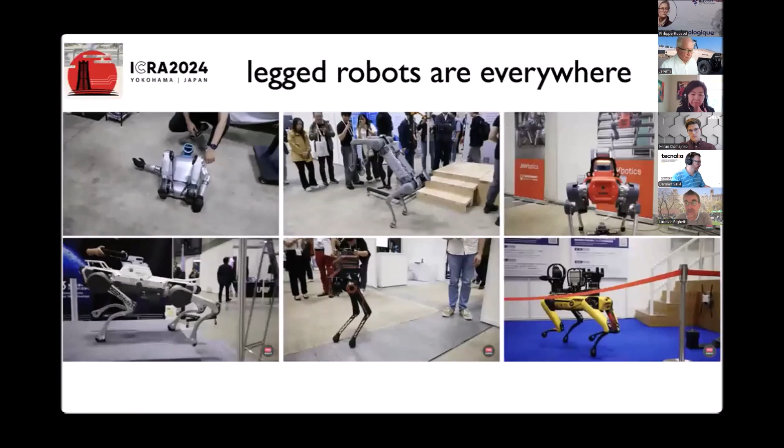I titled my talk: is robotic locomotion a solved problem? I'm asking this question because if you go to a robotics conference these days, this is what you will see: robots walking everywhere.

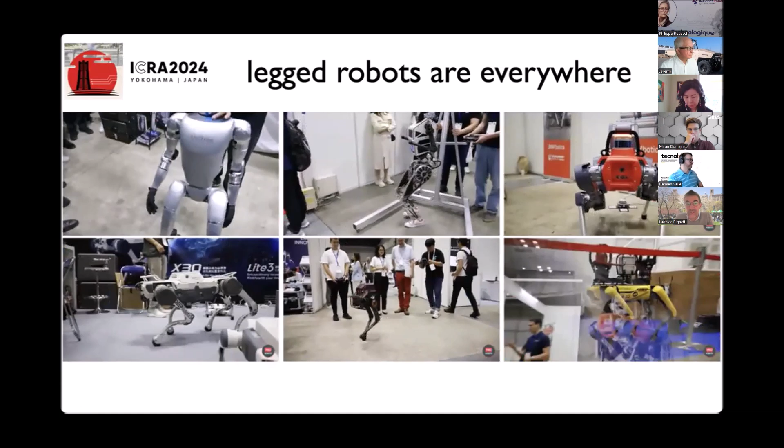And this is really new. Five years ago, you would never see robots walking around so casually, with crowds around them and things like that. So one of the big questions is, what has happened? How did we get there?

The easy answer is to say, well, we've made so much progress in science this past few years, that's how we got there. And I was wondering if this is really the case, because leg robotics has a very long history. In 1984, simpler humanoid robots were already able to walk.

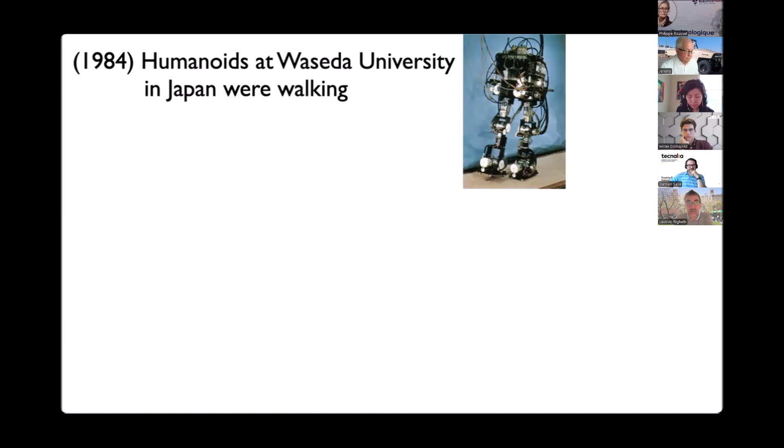At Waseda University, they built a lot of humanoids, and they were already walking in 1984, which is 40 years ago. If you look a bit closer, the MIT Leg Lab had robots that were able to do crazy things—jump, backflips—and these are all things that we see today in robots, and this was already 30 years ago.

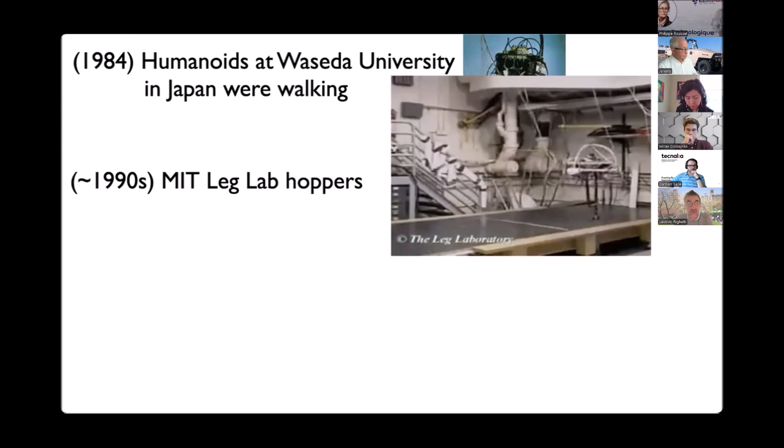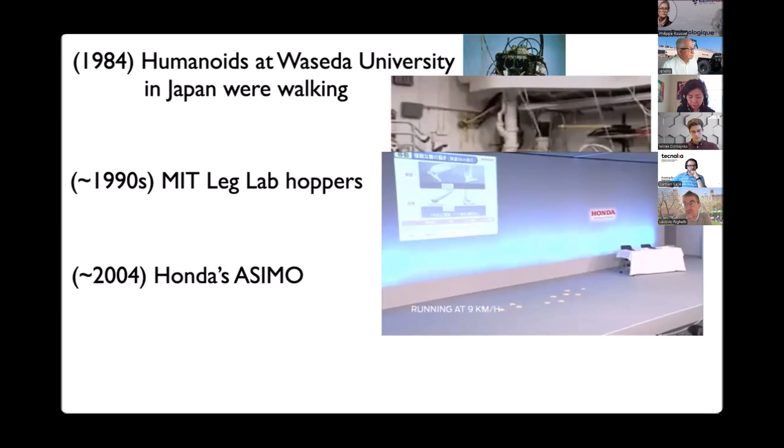A bit closer, 20 years ago, look at Asimo, the robot from Honda. It was able to run—it was actually the first humanoid robot that was able to run. And if you compare that to the latest humanoid robot of Tesla, you could argue that Asimo is actually much more capable of movement, and that was 20 years ago.

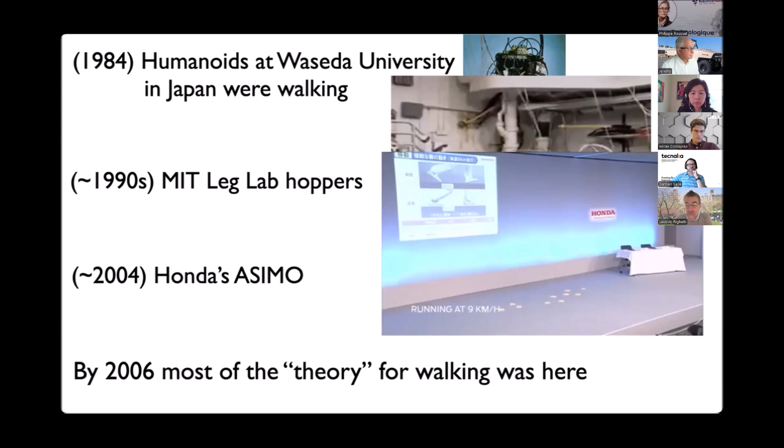And if you look at the science of walking, most of the theory we use today to get robots to walk already existed by 2006. So one of the questions I was wondering is: why didn't we see tons of leg robots back then? Because everything was there—all the tools we needed, to some extent, already existed 20 years ago or before, and robots were already able to do very impressive things.

So there are two things I'd like to explain. One is that at the time, robots were able to do many impressive things, but were not able to adapt their behavior in real time—I'll explain what that means a bit later.

And very few people actually had access to leg robots. Most of these robots—if you wanted one, you had to build your own, and it was really a small club. To be part of the club, you had to be able to build your own leg robot, so very few people were actually able to do research in leg locomotion.

So a long time ago, let's say 20 years or more, this is how things would work to get robots to walk: you would compute offline, before putting it on the robot, all the movements you wanted the robot to do—what should be the motion of the legs, what should be the motion of the arms, and everything like that. That was done in advance.

And once you had that, you had a controller and some sort of stabilizer that was just trying to follow this plan. Online, you were estimating the state of the robot, what was going on, and then you would just execute this plan.

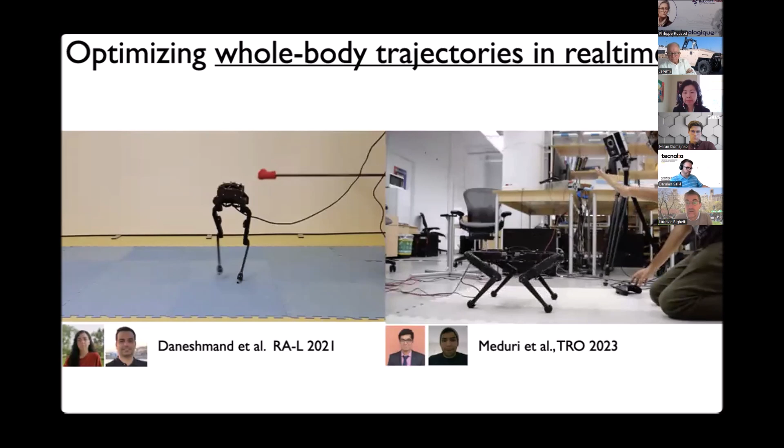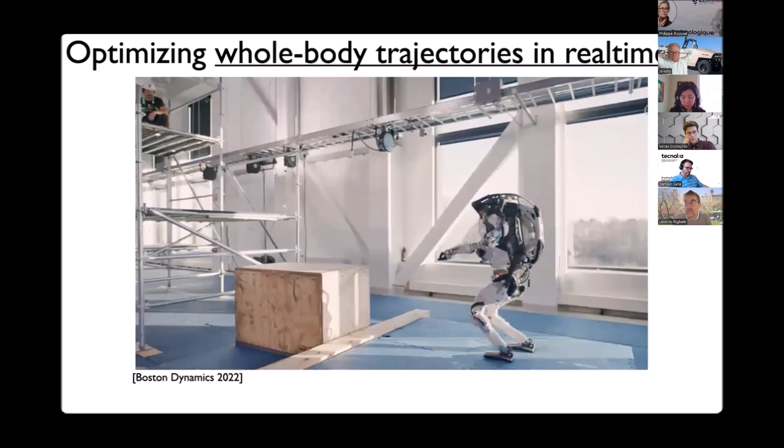To give you something you've maybe seen, this is the exact technology that has been used by Boston Dynamics. They use this kind of idea where you optimize on the fly what you want to do, and this is how you get the robot to do a front flip like that. So this is a very powerful technology.

So this is where we were at maybe a few years ago. We were able to do these things online and do very complicated things. Here what we optimize is the next trajectory. But then you always have to re-optimize each time something changes. Each time you measure a new state or the environment has changed, you have to recompute and re-optimize what you should do. So people say, okay, why don't we just optimize every possible configuration for every possible state I might be in, every possible obstacle I might see? Why don't I optimize that?

So it's a much more complicated problem now, right? Because I have to optimize a function that is going to map every possible state to an action. And this is what we call reinforcement learning. And this really made a huge difference.

But now the kind of irony is that we start to redo everything offline because it's way too expensive. So now we compute offline using a simulator. We simulate millions of different ways for robots to do different behaviors, for walking, for example. And then we encode into a neural network, which is our policy, the function that maps for every possible configuration of the environment and the state of the robot, what the robot should do. And you do that offline. So it can take a few hours, maybe a day, if you do very complicated things.

And once you have that, you have a policy that you can just query online, and it will actually perform a certain behavior. So there's no more deliberation online. Everything is done offline. But what is really nice when you do that is that you can suddenly fuse in your policy all your sensory information. That's something we were not able to do before, is to fuse vision and all the sensors that you have inside your policy. So now your robot is able to react to visual changes of the environment, for example.

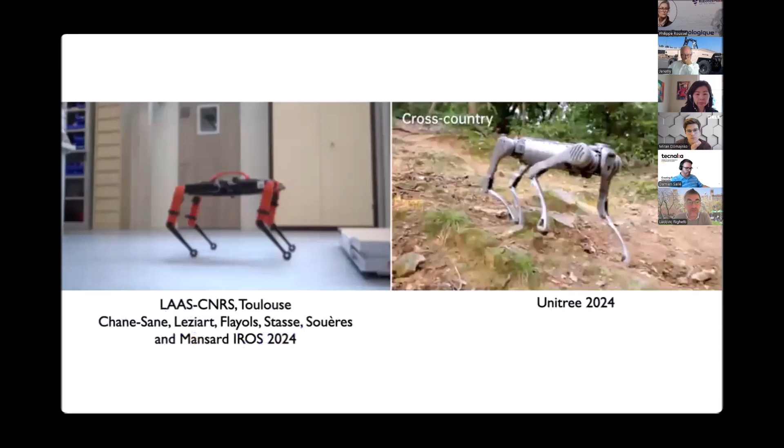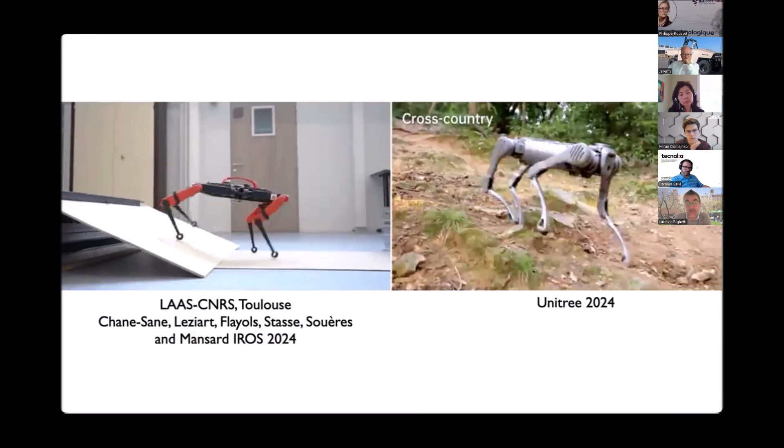So for example, on the left is our work done by my colleagues at the LAAS-CNRS, and I think Philippe is one of the people who pushed that in Toulouse, to basically learn very complicated behaviors. Now you can start to have a robot that can go upstairs, go down slopes, and it's completely, you can compute a policy that can do all of these things on the fly, which is really impressive.

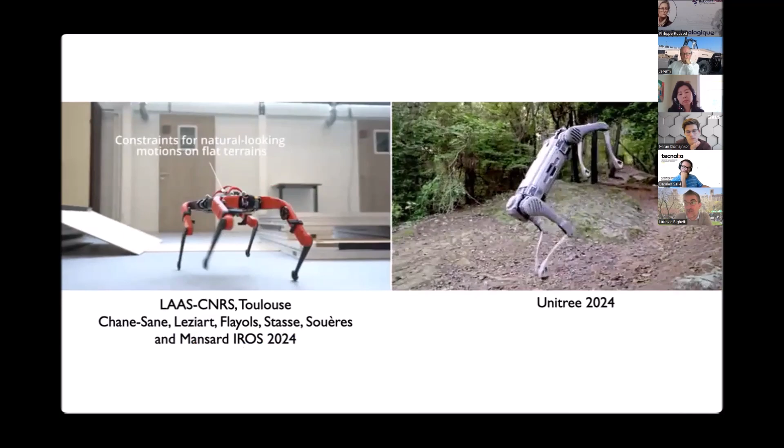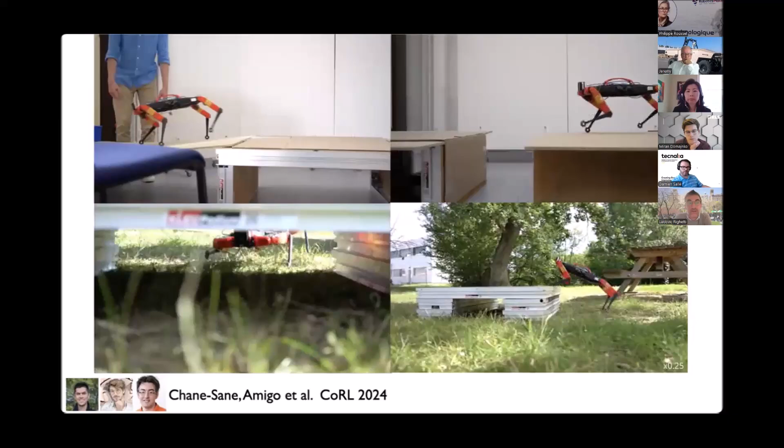On the right side, it's a recent example from Unitree, a company that built this quadruped robot, where they're able to do very dynamic things by training policies using reinforcement learning. More recently, I worked with colleagues at LAAS-CNRS where we also included vision, to have robots do some sort of parkour, where robots are able to jump obstacles, deciding depending on the obstacles if they need to go under or above, and this is all done automatically. So you can do very rich behaviors out of this technology.

So as a community, we spent many years trying to do everything online and trying to recompute things online. And now we kind of took a step back and said, how about we brute force everything offline? And then we're going to have something we can use online where we don't have to optimize anything.

The key thing that now people are working on is that we would like to do basically both. We would like to do everything offline using big data as much as we can to pre-compute everything that we can. And then online, we actually want to re-optimize a little bit such that we can adapt to anything we have not seen and ensure that we can get very safe behaviors. So this is kind of ongoing work we're doing in my lab.

The other thing is now to add more logical reasoning. You want robots to be able to have logical reasoning, understanding that if something happens, you need to logically change what you were doing and your steps such that you can actually achieve your task. These are the next big things that people are working on in leg locomotion and also in manipulation.

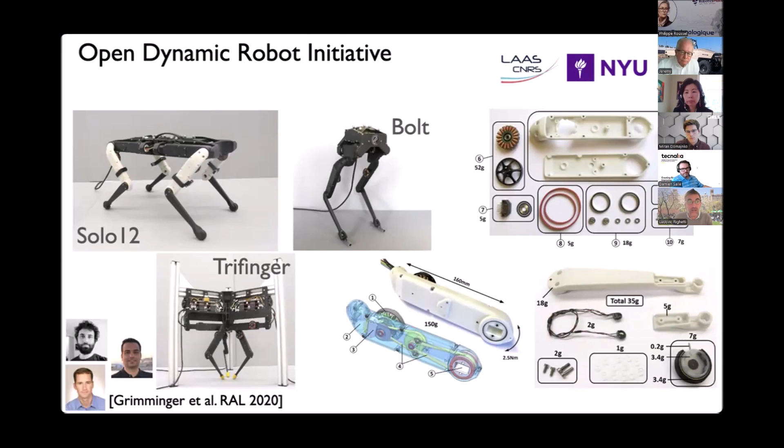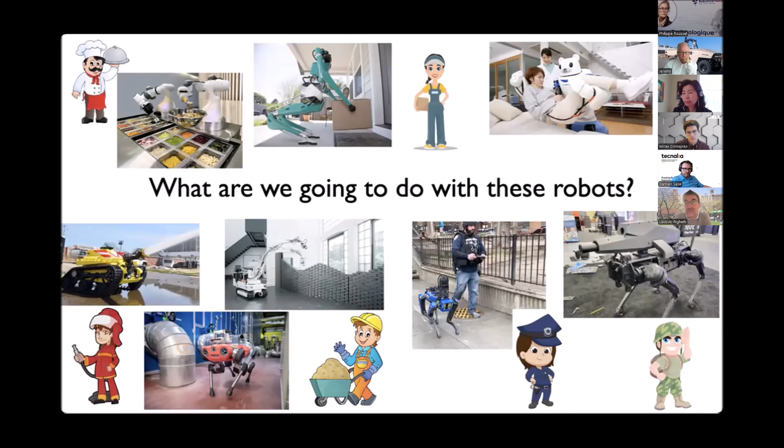The last thing I've not talked about at all is that now we have a lot of quadruped leg robots that move around. What are we going to do with those? There's lots of possible applications, and a lot of people are trying to get these robots to do applications. And here you might see things that you like, and you might see things that you don't like. I guess the next big thing for us is to really think hard about what kind of robots we want and how we want to use them, and what kind of robots we don't want, and how we should not use them.